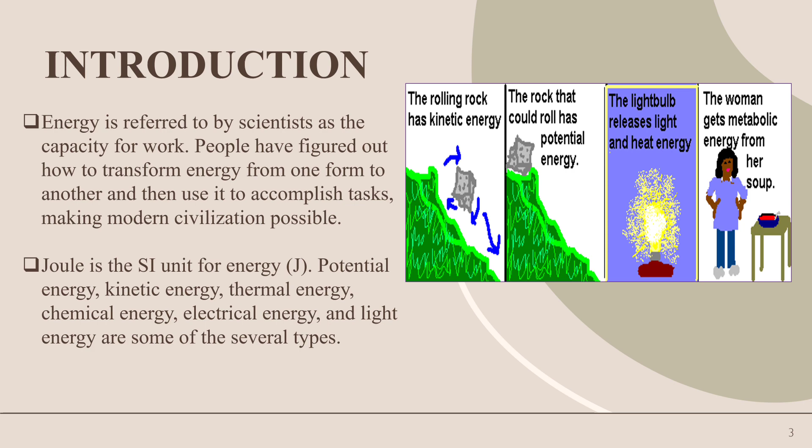Now let us move towards the introduction part. Energy is referred to by scientists as the capacity for work. People have figured out how to transform energy from one form to another. Joule is the SI unit for energy. Potential energy, kinetic energy, and thermal energy are some of the several types. As you can see in the diagram, there are various types of energy which has been released.

The renewable energy sector is anticipated to continue growing and reach the necessary numbers in 2023 with the capital flow and the government backing in the form of forward-thinking policies. India has advanced much in this area. It installed 156.83 gigawatts of green energy successfully by November 2021, or more than 40% of the goal capacity. Raj Kumar Singh, the Union Minister for Electricity, asserts that India is now poised to surpass the updated prediction for 2030.

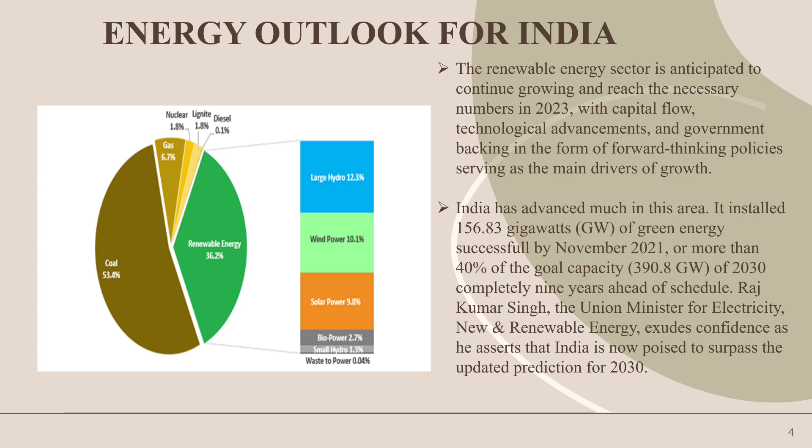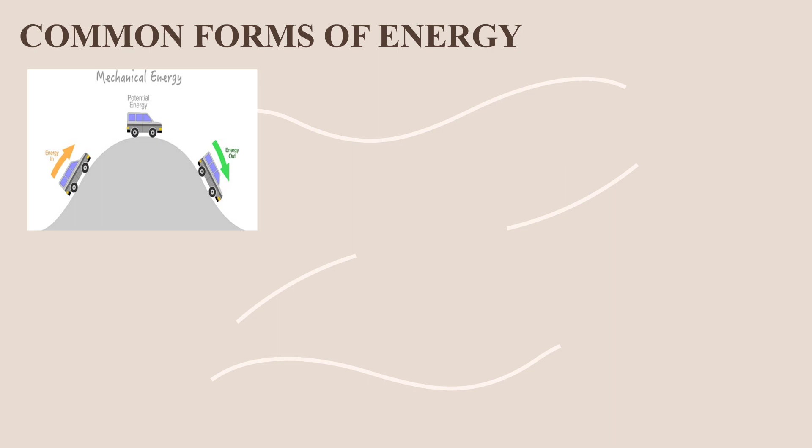Now let us look at the common forms of energy. First one, mechanical energy. It is the sum of kinetic energy and potential energy in an object that is used to do a particular work. Second one will be electrical energy, which is generated by the movement of electrons from one point to another.

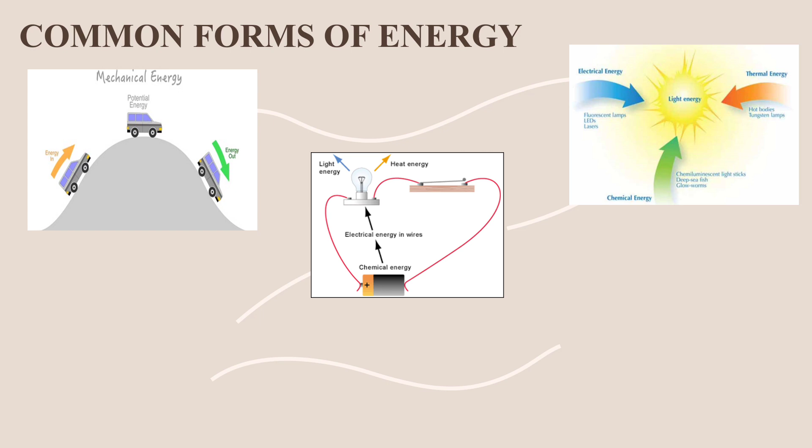Third one will be light energy. It is a kind of kinetic energy with the ability to make types of light visible to human eyes. Fourth one will be thermal energy, the energy contained within a system that is responsible for the temperature. Fifth one will be sound energy, which comes from the vibrations moving through something.

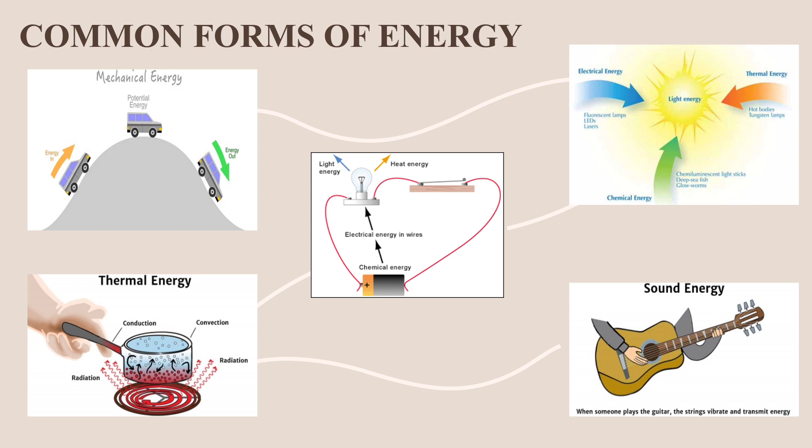So now let us know the classification of energy sources. Energy sources are further divided into conventional sources and non-conventional sources, where conventional sources have been divided into two types, commercial and non-commercial. Non-conventional sources have various types of energy like bioenergy, solar energy, wind energy, tidal energy, and energy from urban waste.

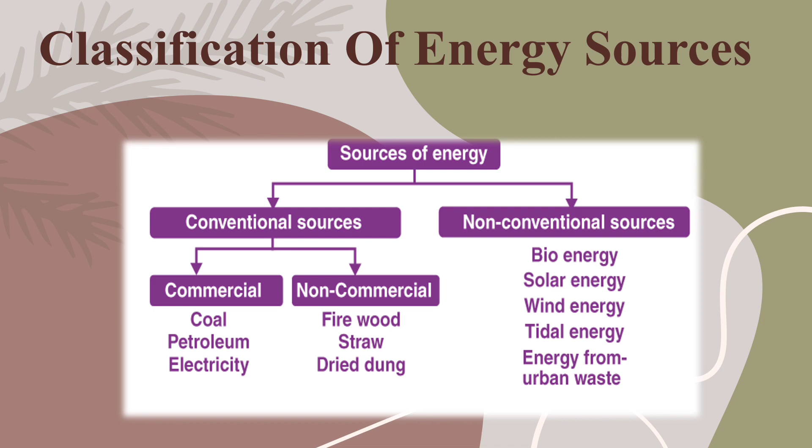Conventional energy: non-renewable energy sources like coal, petrol, and oil are classified as conventional energy since they run out within a certain amount of time and do not refill themselves. There are two types of conventional energy. Commercial energy sources are those that are utilized to produce power and that may be purchased with a set price from the market. Electricity, coal, and high-tech petroleum products are the commercial energy sources.

Non-commercial energy refers to energy sources that are typically free for consumers. Uses for this type of energy include the burning of wood, agricultural waste, and animal waste.

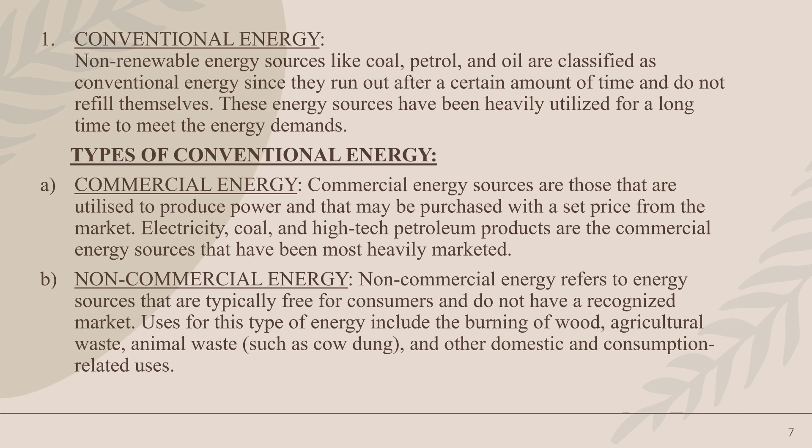Non-conventional energy includes wind, tides, solar, biomass, and other forms of nature. They are free of pollution, therefore we can use them to produce waste-free clean energy. There are various types of non-conventional energy: hydro energy, solar energy, wind energy, geothermal energy, biogas energy, biomass energy.

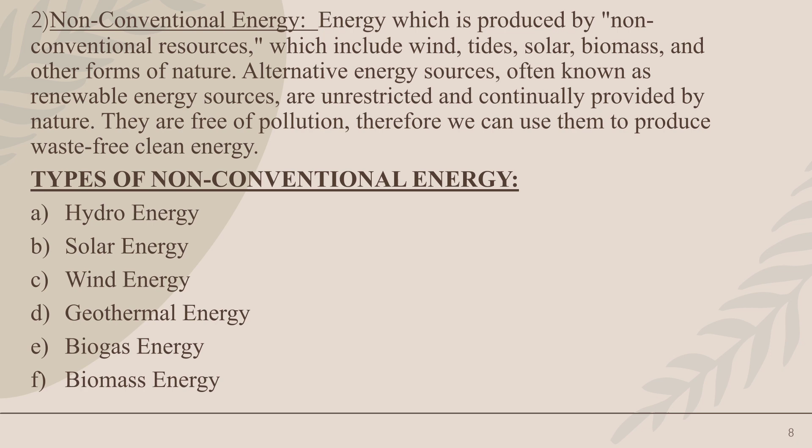Advantages and disadvantages of non-conventional energy sources. As you can see, there are various types of advantages and disadvantages. Advantages of non-conventional energy sources are: they are available in nature, they are free of cost, they are inexhaustible, little pollution, low gestation period. Disadvantages are: high cost of harnessing energy, uncertainty of availability, difficulty in transporting, low efficiency level, and they are harmful to wildlife and the surrounding environment.

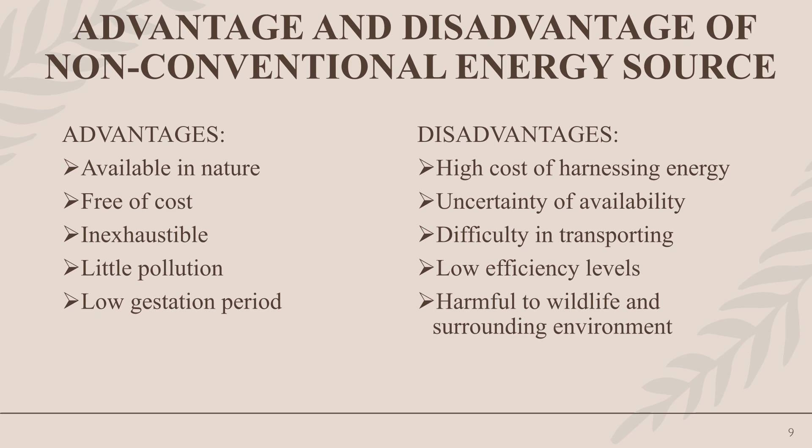Renewable energy comes from natural sources that replace themselves more quickly than they are used up. In most nations, renewables are now more affordable and create 3 times as many jobs as fossil fuels.

Non-renewable energy is derived from fossil fuels including coal, crude oil, natural gas and uranium, it is referred to as non-renewable energy. Non-renewable energy requires human intervention to make it appropriate for use, as contrast to renewable energy.

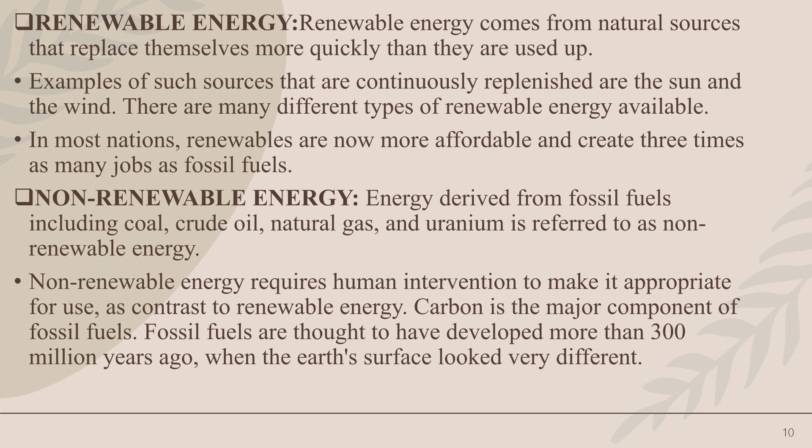There are types of non-conventional source of energy: solar energy, wind energy, hydro energy, biofuel and biogas energy.

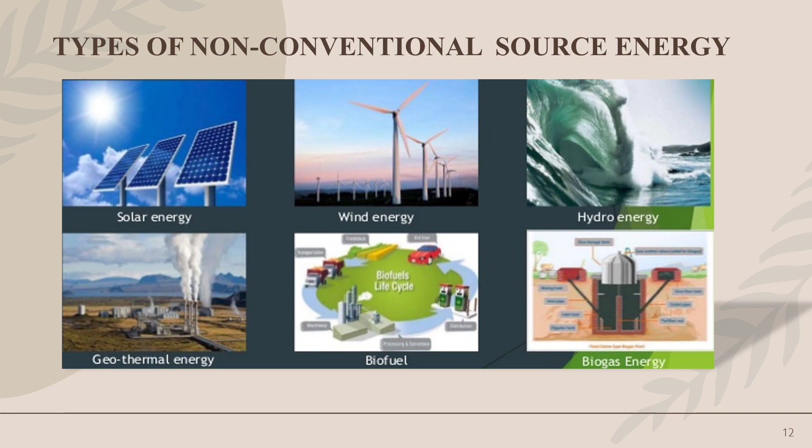Solar energy is the term for solar radiation that can create heat, trigger chemical reaction, or create electricity. This highly distributed source has the ability to meet all future energy demands if properly exploited. The total solar energy incident on Earth is far greater than the global energy needs at the moment and in the future.

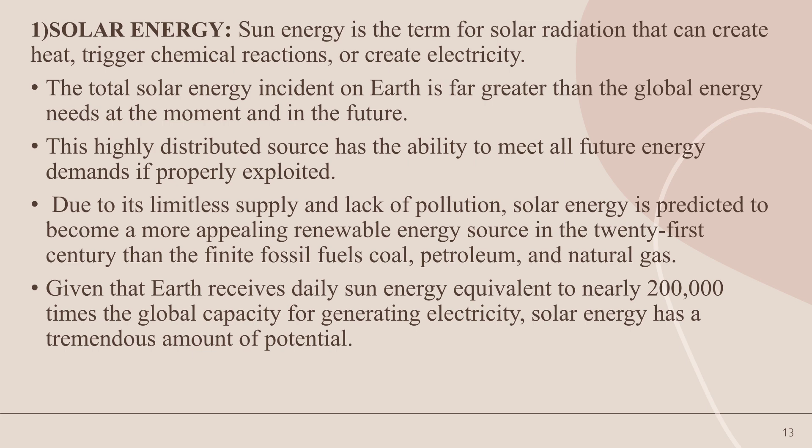Wind energy is indeed a byproduct of the sun. Wind is the result of the unequal heating of the atmosphere by the sun, the uneven surfaces of the earth, and the planet's rotation around the sun. As wind is always available, it is a resource that may be used indefinitely as long as the sun continues to heat the earth.

As you can see, this is the working of the wind energy.

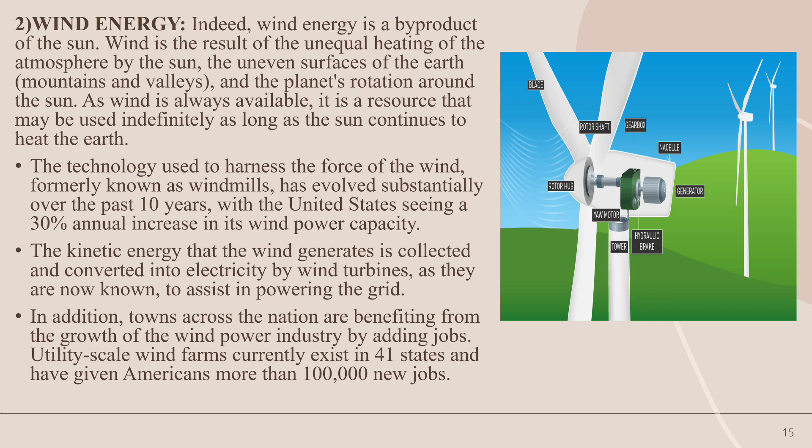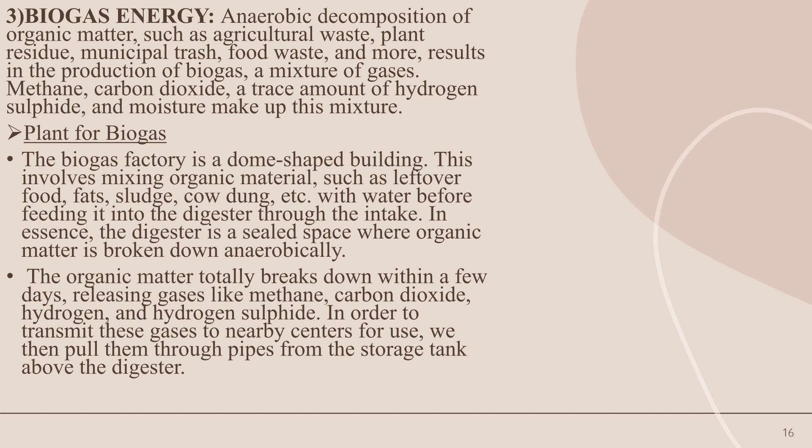Biogas energy. Anaerobic decomposition of organic matter such as agricultural waste, plant food waste, and more results in the production of biogas. The biogas factory is a dome-shaped building, as shown in the diagram, where this involves mixing organic material such as leftover food, fat, sludge, cow dung, etc. with water before feeding it into the digester through the intake. In essence, the digester is a sealed space where organic matter is broken down anaerobically.

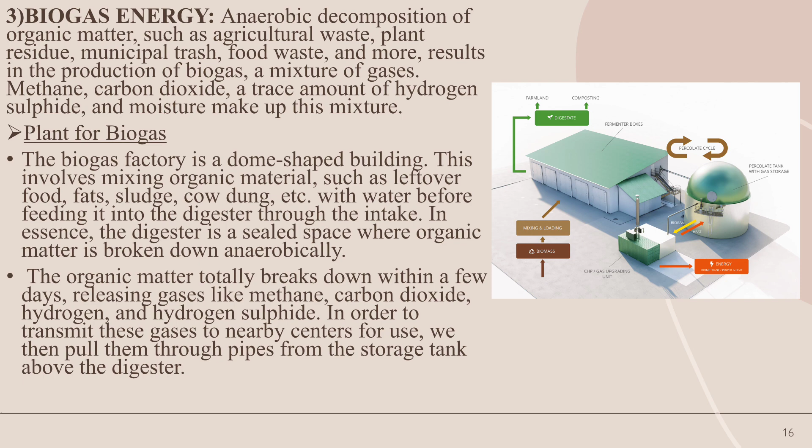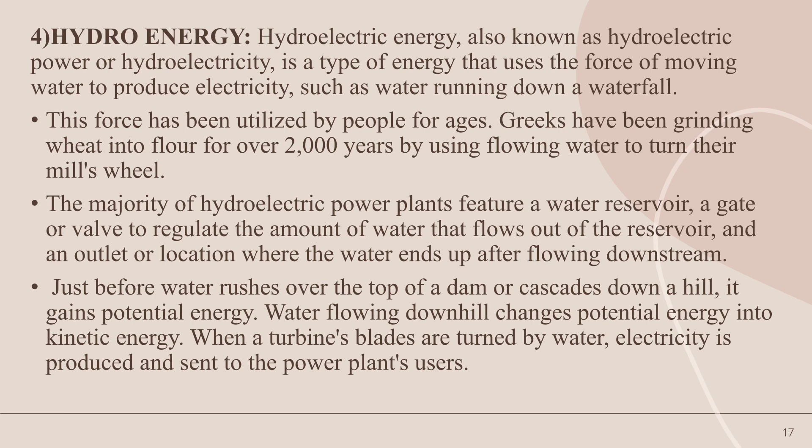Hydroenergy. Hydroelectric energy, also known as hydroelectric power or hydroelectricity, is a type of energy that uses the force of moving water to produce electricity, such as water running down a waterfall. The majority of hydroelectric power plants feature a water reservoir, a gate or valve to regulate the amount of water that flows out of the reservoir, and an outlet or location where the water ends up after flowing downstream. As you can see in the first diagram, it is the Sardar Sarovar Dam, which is being installed in India, located in Gujarat. The second diagram shows us the working of hydroelectricity.

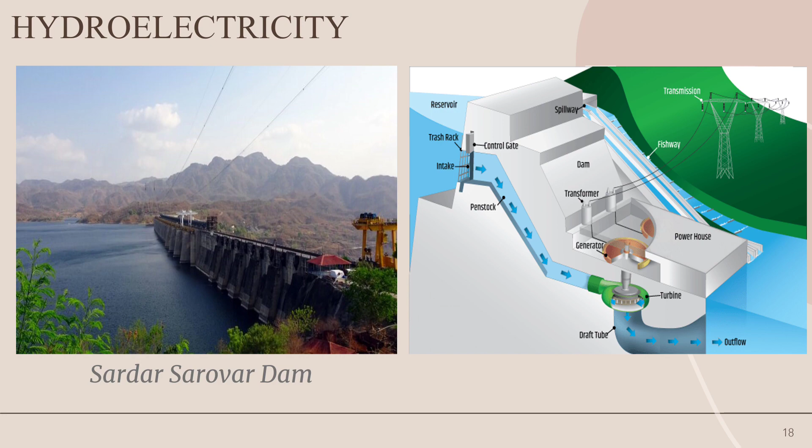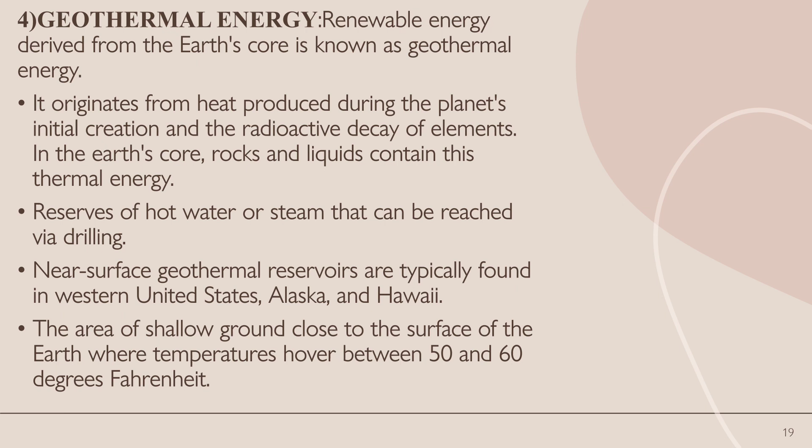Geothermal energy. Renewable energy derived from the Earth's core is known as geothermal energy. It originates from heat produced during the planet's initial creation and the radioactive decay of elements in the Earth's core. Rocks and liquids contain this thermal energy, and reserves of hot water or steam can be reached via drilling. As you can see in the diagram, this is the working of the geothermal power plant.

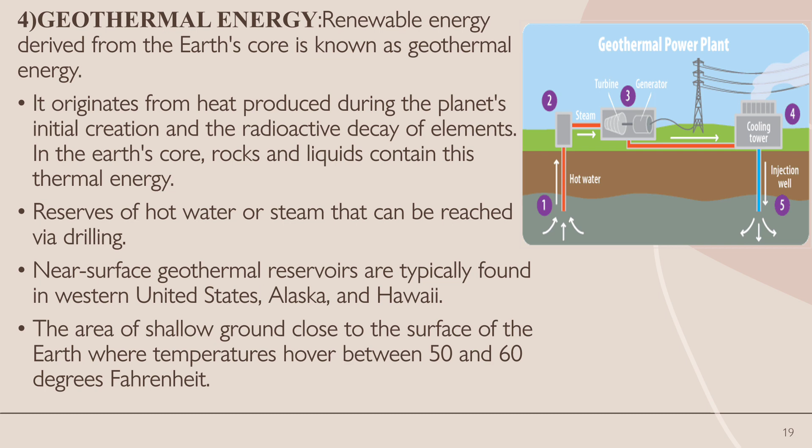Sun energy can be employed in a variety of technologies. As you can see, these are the various technologies: solar water heating, solar heating of buildings, sun drying of agricultural and animal products, solar pumping, solar cooking, solar furnaces, and electricity generated from the sun.

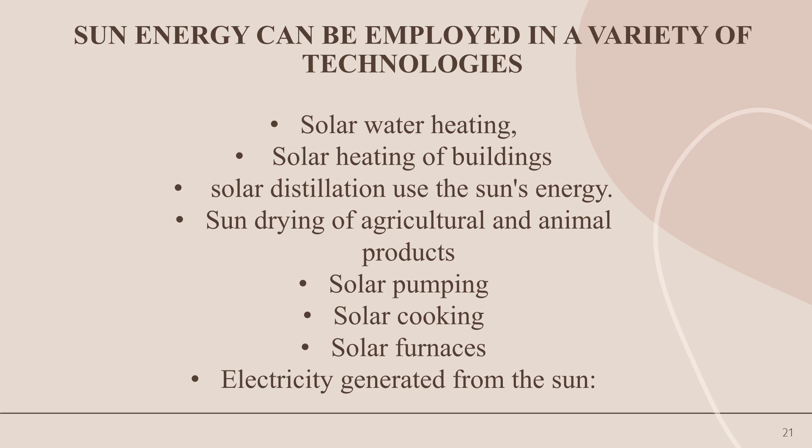Greenhouse effects. The primary consequence of higher greenhouse gas levels is global warming. It is the phenomenon of a steady rise in the atmosphere's average temperature. This is due to the rising emission of greenhouse gases like carbon dioxide and methane from burning fossil fuels, as well as from vehicles, factories, and other human activities.

Depletion of the ozone layer. The planet is shielded by the ozone layer from the sun's deadly UV rays. It is located in the top reaches of the stratosphere. The Earth's surface is exposed to dangerous UV radiation as a result of ozone layer loss, which might cause skin cancer and significantly alter the climate.

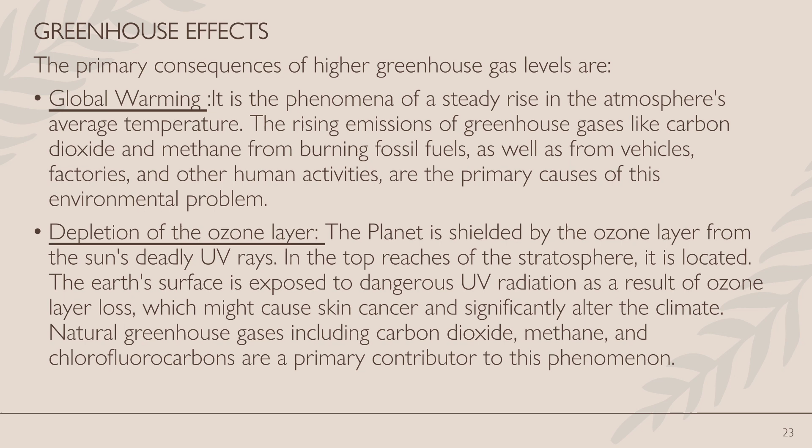So, the conclusion of today's topic is: demand for non-conventional sources is growing because fossil fuels are one of the major contributors of global pollution. Non-conventional energy sources are frequently referred to as renewable energy sources, and sources of energy that can be found abundantly in nature without us having to look elsewhere. Solar, wind, and tidal energy are a few examples of non-conventional energy sources. Though at present it is still a work in progress and its adoption is only limited to first world countries, despite the costs associated with them, they are expected to decrease and be widely accepted. Thank you.